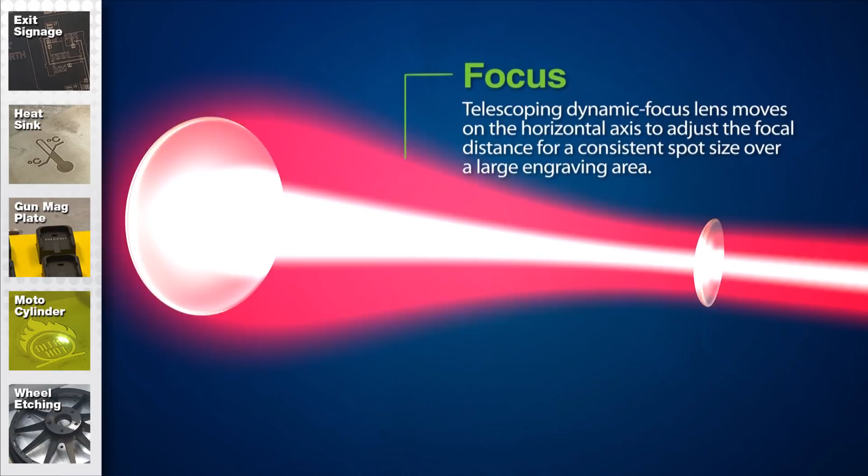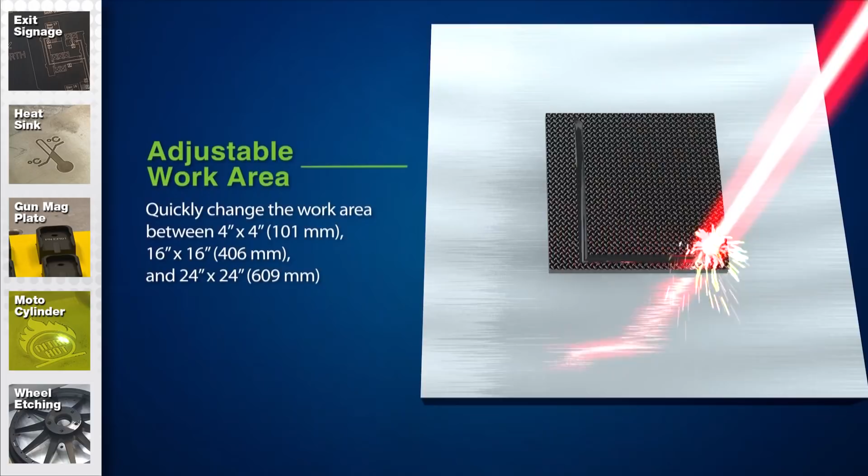With the Epilog G2, we're using a 3-axis Galvo with a translator optic in here. The translator optic has a dynamic adjustment that compensates for beam diameter as we're marking over a much larger area. So with the G2, we've identified and described 3 different marking fields in the machine.

We have near field, which gives us a 4x4 area, midfield, which is a 16-inch area, and then in far field, a 24-inch area. Big advantage for a lot of our customers that are doing multi-part marking or large pieces that they want to mark as well. We'll go over that a little bit more as we're going along with the demonstration.

Also, in regards to laser sources, we're using 2 different types of lasers. We have a Q-switch laser and a MOPA laser. A Q-switch gives us a fixed pulse length, limited frequency ranges, typically used for deep engraving or surface marking. It's going to offer our customers a little bit lower price.

The MOPA laser is master oscillator, power amplifier, gives us a variable pulse length laser, greater frequency ranges, essentially more knobs to turn to produce different types of marks on the metal. More used for finer control on metal marking and engraving, enhanced plastic marking, and in some cases, nice colors on different types of metals. So with that, let's get started with marking some metals.

We're going to jump into the software suite, set up some jobs to run in the laser, and we'll get started right now. Before we get started processing materials, I'd like to spend a little bit of time on the control panel of the laser system. Power switch on the right-hand side.

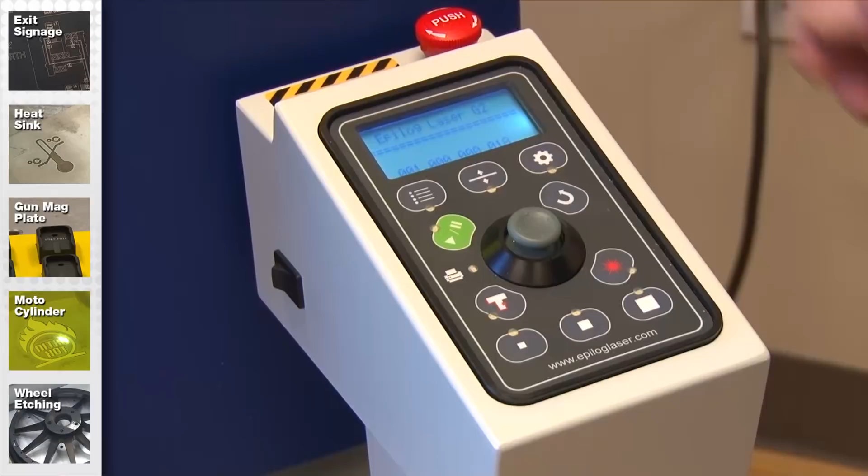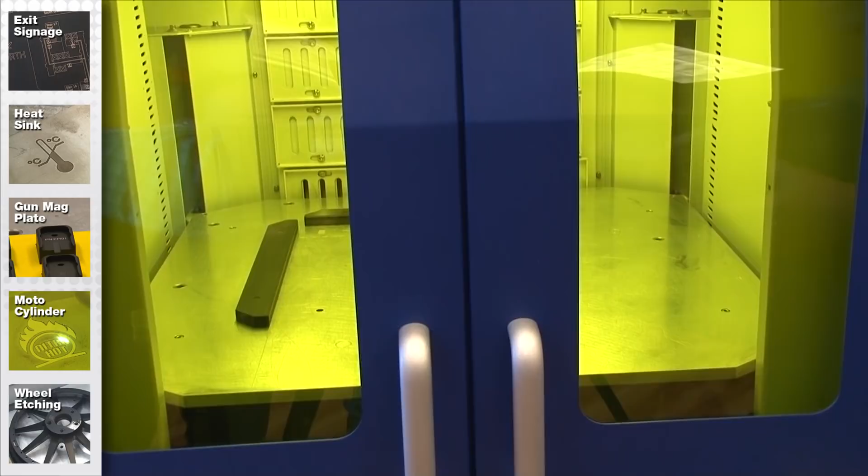The first thing you notice when we turn the laser on is that we've got a nice lighted cabinet in the machine. We can toggle that on and off. Sometimes it helps with the red diode pointer for locating focus and also tracing where you're going to mark on a part to turn the cabinet light off. Just provides for a little bit better view of the red diode pointer.

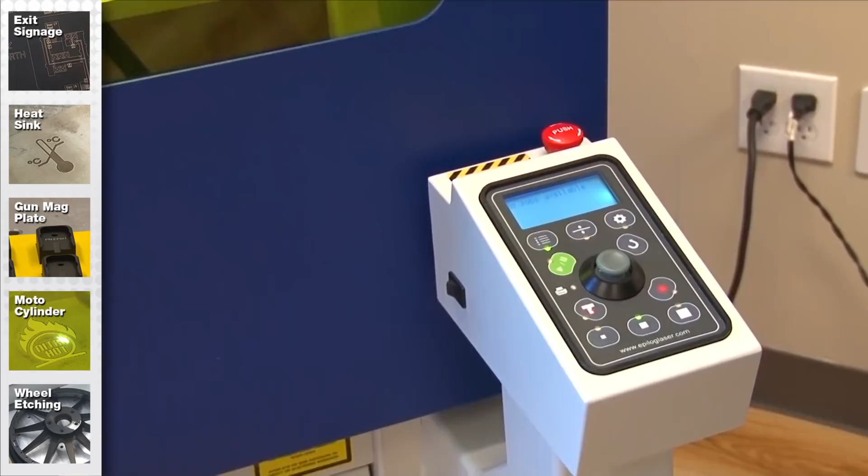At the control panel, you can see we've got a variety of different buttons here. It's all symbol-based information here. This is our jobs list. We don't have any jobs in here currently, but if we had sent multiple jobs over, we could push this button and then scroll through and select the job that we want to run. This is our focus feature.

Right now, we have the laser system set in the midfield, so this provides us with a 16-inch by 16-inch marking field. Currently, the table is sitting at about 25 millimeters higher than the ideal focus range in this machine. This button is pretty neat down here. These describe the different fields that we're working in.

If we wanted to mark in near field, we simply push and hold this button. You'll notice that we get a moving translator here. And now you see that we're 238 millimeters off. So in this case, we would want to raise the table up until it's at a 0 focus. Then we're in the ideal focus range.

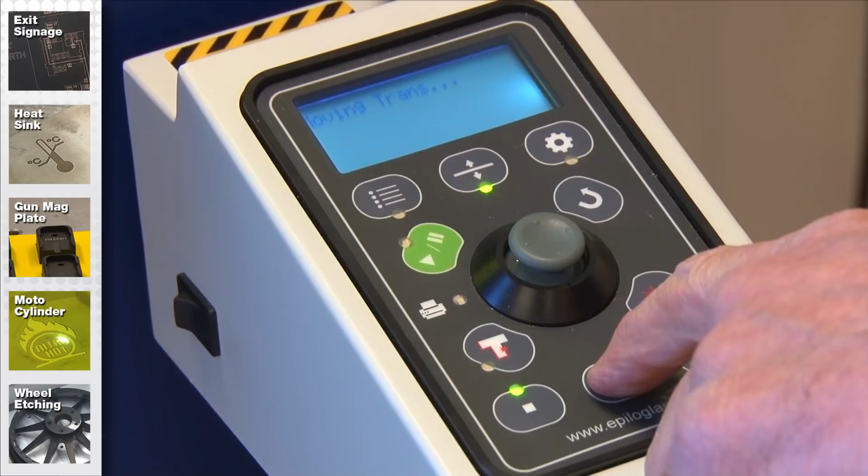If we switch back to midfield, which is what we're going to use for our first engraving marking that we do today, you notice that I press and hold this button, and this brings us to a 0 focus in that location. Same thing would apply here for far field. If we wanted to move to the far field, we'd push this once.

The translator moves within the Galvo device, and then if we press and hold this, the table would go all the way down to read a 0 focus, then it would be in the ideal focal range for that location. But we're just going to switch back to midfield marking for now.

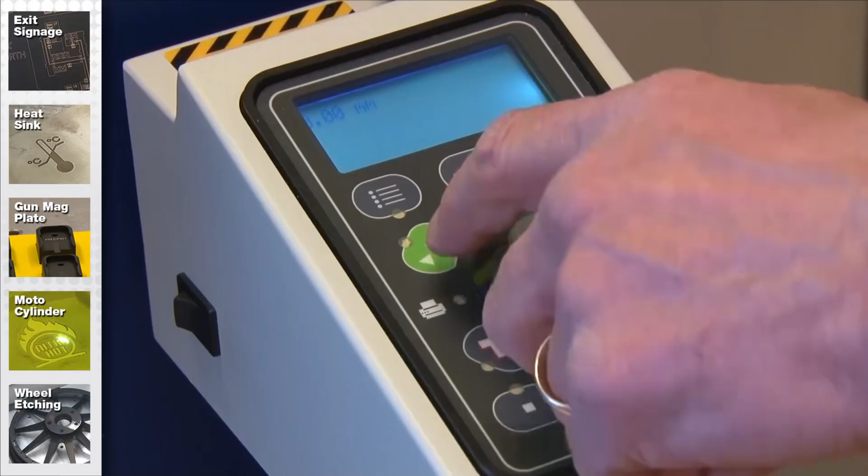This button is a start and pause button while you're running a job. To start a job, you push this button, that starts it, and then to pause it, you press it again. That will pause the job. If you repress the go button, it will start up right back where we left off.

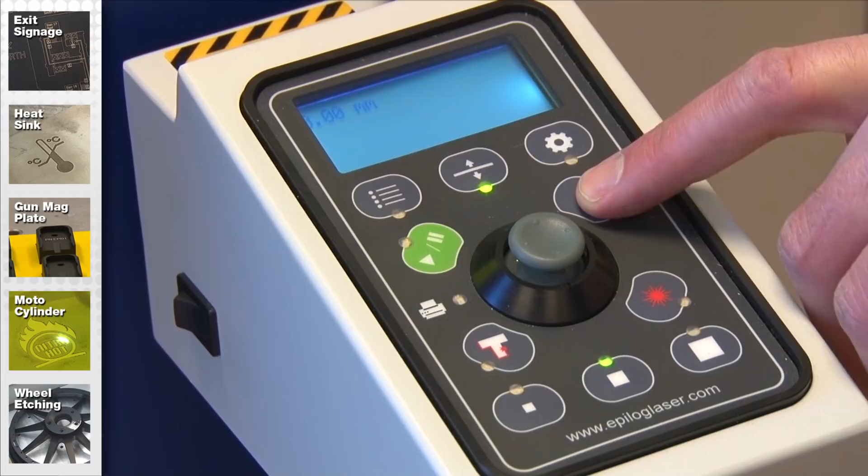This would be a reset button. If you started the job and you want to stop that job in process, you could hit this and that will reset the job.

This is our trace function. So when we're running a job, we want to make sure that we're going to be marking in the correct location. We press this button and that provides a red box around the location of where we're going to be marking. Really handy for making sure that you're marking in the right location.

And then lastly, this is the tools button here. This is where we set the IP address for the machine. I should point out that all Epilog laser systems, including the G2, can operate through either a USB connection or a network connection. Network connection is really favorable with a lot of our customers.

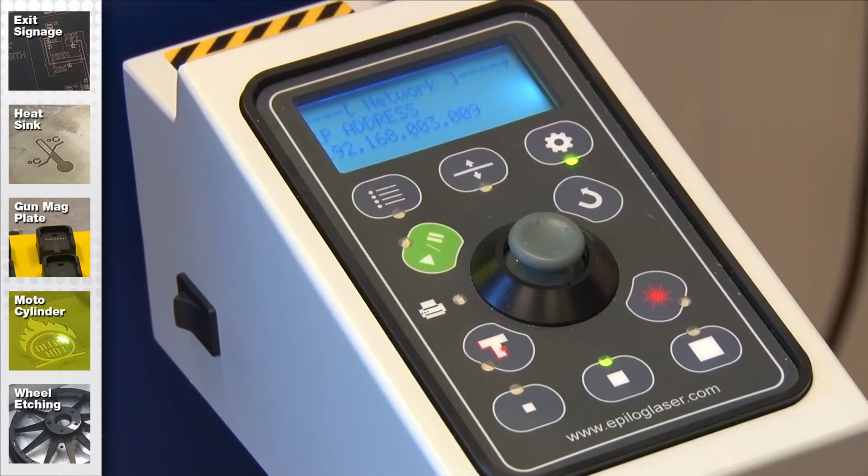They may have 2 or 3 or 4 flatbed lasers running through a network. They can simply hook this up, just establish a new IP address for the G2, and direct different laser jobs to all of those different laser systems through the different IP addresses. So in here we set all of the parameters, all of the base settings for this machine. So a little bit about the control panel there.

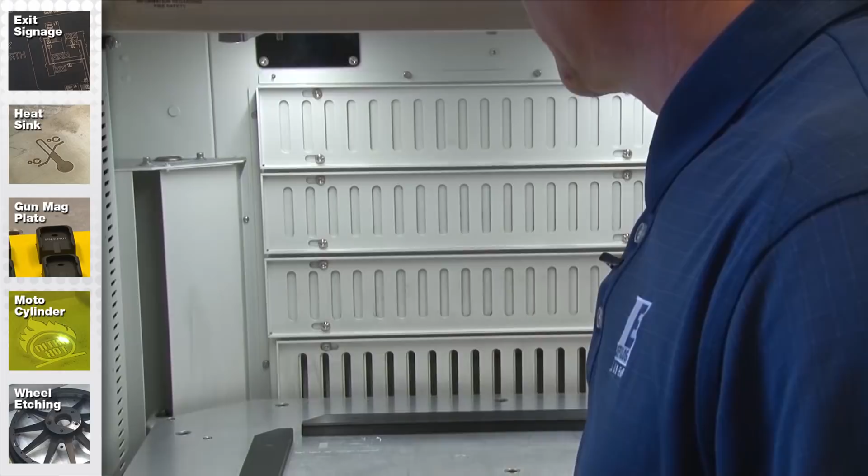Inside you'll notice that in the back of the machine, we've got louvers that allow us to close and open different regions on the table. If we're marking in near field, for instance, we could close this louver, open this one. This allows the particulates, the vapors created during the marking process, to be efficiently removed from the laser system cabinet. So we've got louvers for all 3 different marking fields. We'll open that one because we're going to be working in the midfield today.

Also with this machine, we've got different edge guides that we can use. Right now I've got the edge guide set at this location. This would correspond to the 16x16 marking field. If we're working in the 4x4 marking field, we would set the edge guides right there.

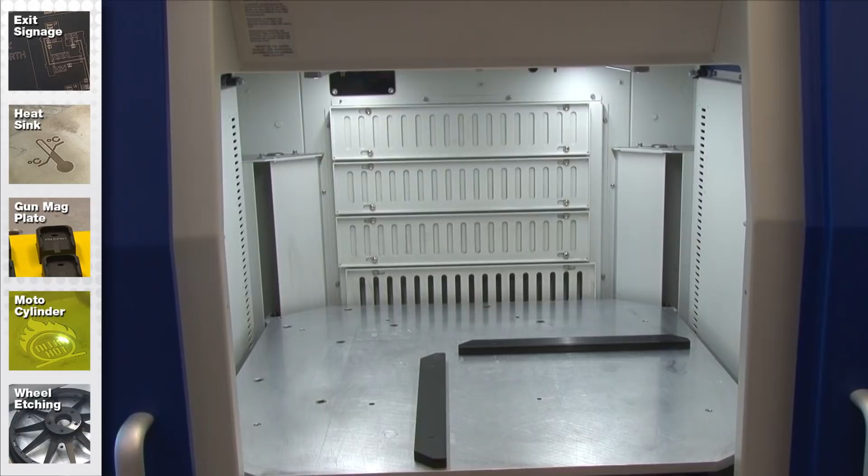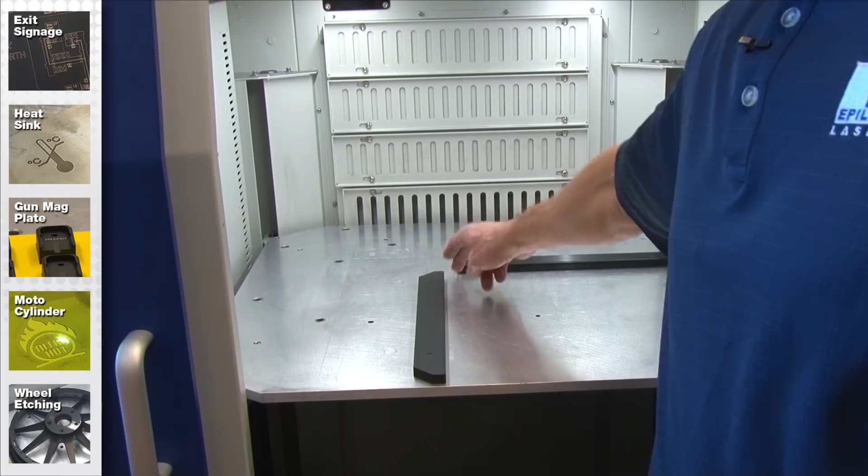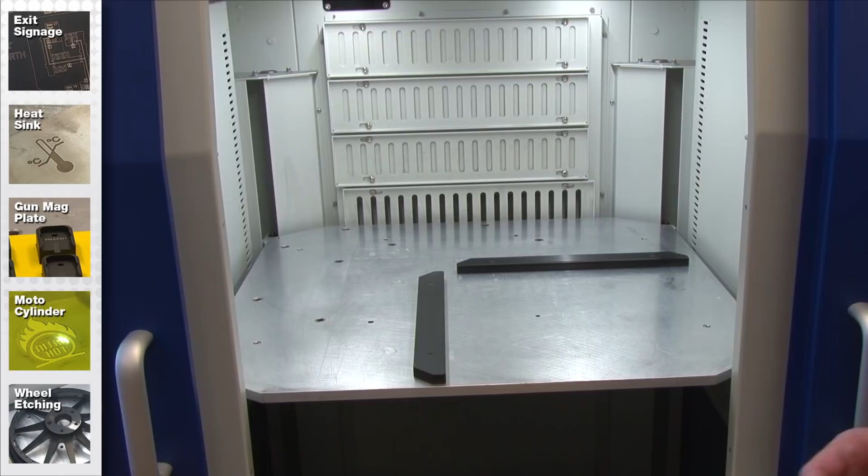What's unique about the G2 as well is that we're working on an XY0 coordinate system. Much like our flatbed lasers, where these two intersect is the 0, 0 position on the table. This would correspond to the upper left corner of the graphic page that you've set up. So really intuitive for a lot of our customers that are used to that type of setup. If we're marking in far field, we would simply move the edge guides out to this location. And then again, this upper left corner would correspond to the upper left corner of that 24x24 space.

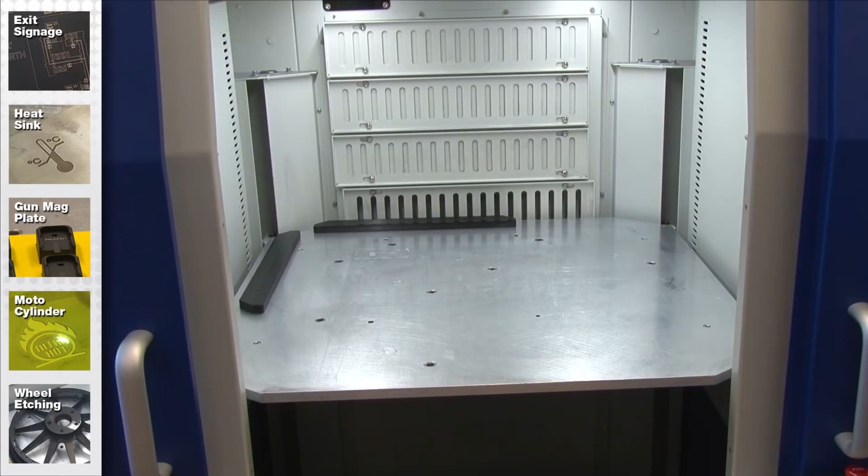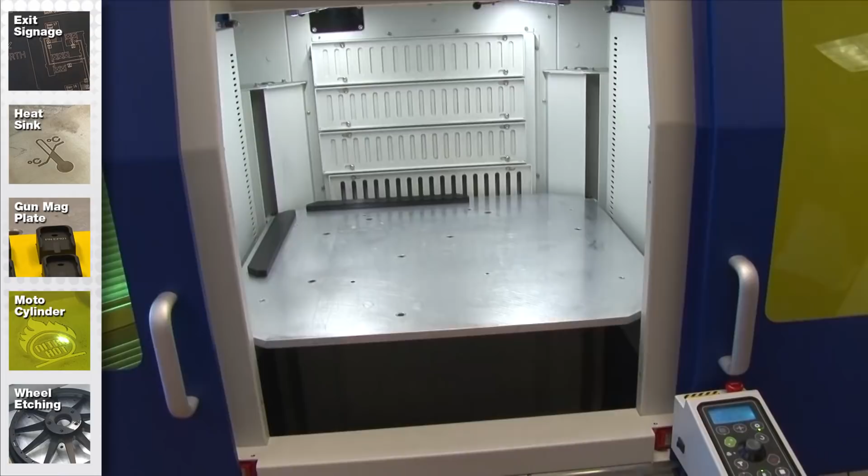So just a little preview on the control panel and then inside the laser system. Let's move now over to the artwork side and the software suite, and we'll show you how we set up a job to run in the G2. The first graphic we're going to work on today is just a simple engineering drawing for a building. This is on a 12x12 space here, so we're going to use the 16x16 marking field for this example.

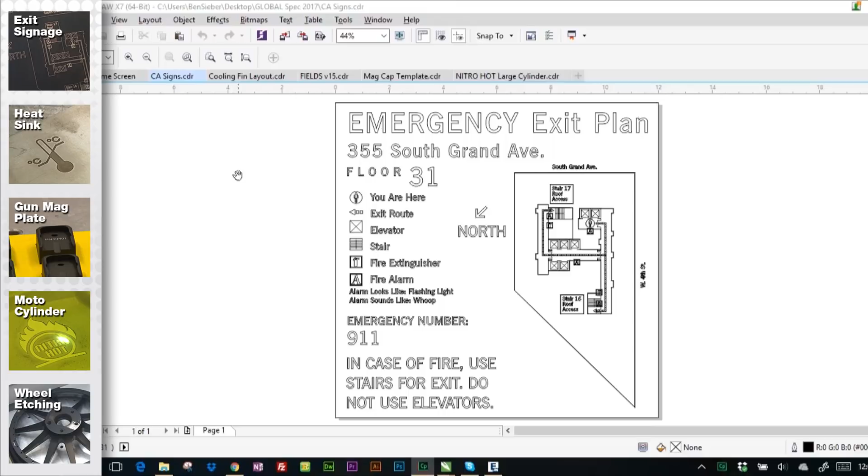You'll notice in this graphic that this is all outline information here. So we have the ability in the G2 to do outline marking by setting a line width to 3/1000 inch or less. This is just going to simply produce an outline over all this graphic that you see here. Later we're going to be doing some marking where we're using filled areas to produce, of course, a different type of effect, but this is going to be a very high-speed mark.

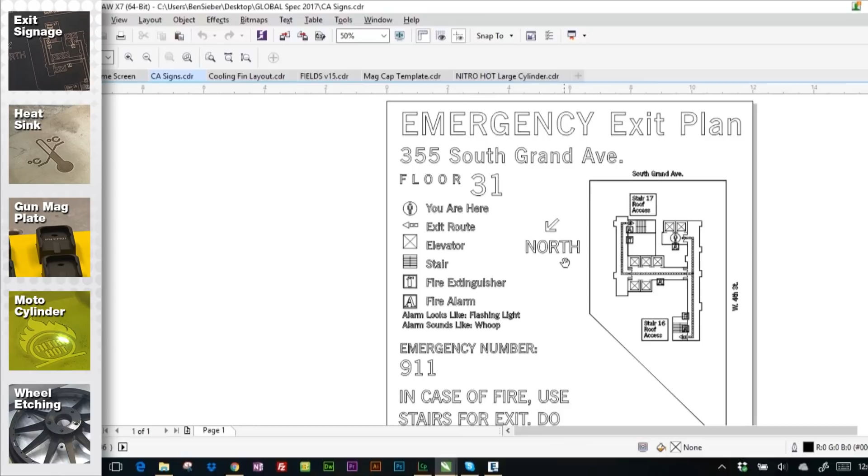Once we've got the graphic constructed, again, we're just using CorelDRAW for our work here. The G2 is compatible with a variety of different softwares.

A lot of our customers will use Adobe Illustrator or InDesign, AutoCAD, SolidWorks, Bartender, Engrave Lab, a variety of different software packages to work with our G2 laser system, much like they do all of our laser systems. So we feel like this is going to be a big advantage to a lot of our customers: the ability to use whatever software they like and are used to, instead of having to use the proprietary software that is typical with most Galvo-based systems.

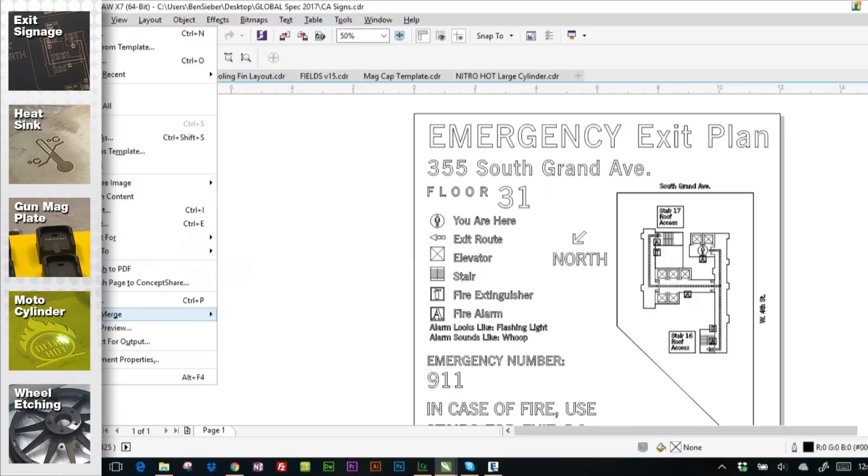So once we've got the graphic created here, we simply go to File and then Print. And you'll notice when we click on the Print button, we have different lasers that we can select from here. You can see a bunch of different output devices. We're going to select the Epilog engraver, and once we've selected that, we go to OK. And here we see our dashboard being populated on the screen. The dashboard is where we set all the laser parameters for this particular job.

I'm going to spend a little time in here just explaining what we're seeing, and then we'll process this job, and then we'll move on to the next one, and we're going to use more functionality in this. So the name up here, CA Signs, this is the job title. We can change this if we wanted to in the dashboard. Autofocus on or off. If we wanted to autofocus on this particular material, the material that we're going to use, just some sheet stock anodized aluminum, is about 0.06 inches thick, so we can program that as well.

For now though, I'm just going to do a manual focus on here. I'll show you how we do that. We'll do some autofocus with some of the other work that we're going to be doing here in a little bit. So for all of our work in the G2, we select the hatch raster type. Here I'm going to select vector on with the graphic that we've got right now. We want to run this in this mode where we're using this vector function. This allows us to do any sort of vector marking that is line width of 3/1000 inch or less.

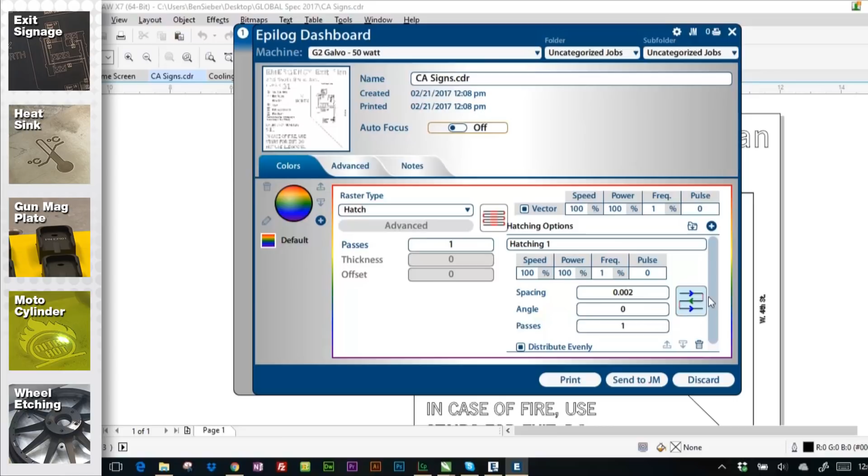If we're going to be doing filled marking, we'll be using these functions down here. I'm going to go over that with some of the samples we've got coming up. So I'm just going to get rid of this for now. And here we're only working with vector. So in this mode, I can set the speed to whatever I want. I know on this particular material, I can do a very high speed mark.

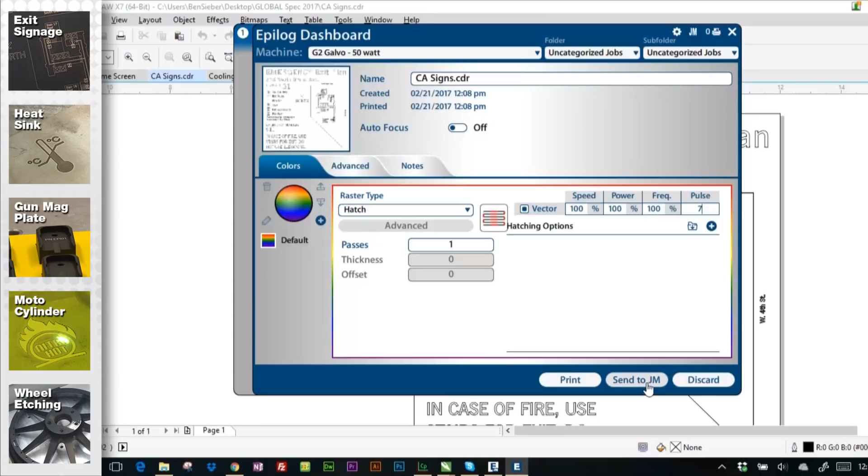I'm going to set the power high as well. And the frequency value, I'm going to set high as well. The pulse range, I'm going to set to maximum at 7. The pulsing values with the G2 range from 0 to 7. 7 gives us more energy to be ablating the material on the anodized. And once we've got all of these set, I simply click Send to Job Manager. And then the Job Manager pops up, and you can see there it is.

The Job Manager basically stores all of the jobs that we're planning to send over to the laser. What's nice about the Job Manager is that you can come back in here into the manager without opening your graphic software and reprint that job from the Job Manager. Also, some features in the Job Manager are really nice. You can open it up. You can change different things.

If we wanted to maybe set the power to 80% here, we could do that and save that. And if we wanted to do a couple passes, maybe we'll do 2 passes on this to get a little bit more depth into the material. We can program that as well. So once we've got that set, I can click on Save, and then here I just click on the Print button in the Job Manager, and the job is transferred over to the laser.

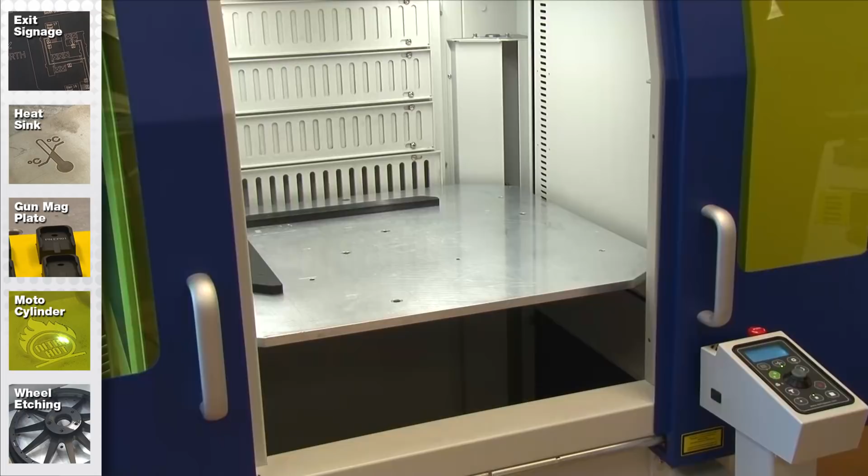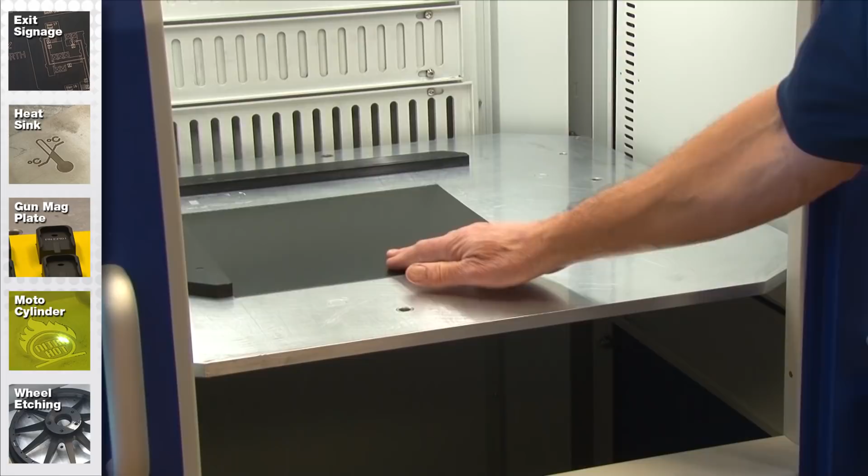So here's my material that we're going to use. Again, just sheet stock anodized aluminum, some industrial signage piece that we're working on. I mentioned the edge guides that go in here. So with the 12 by 12 piece, again, the upper left corner of my graphic page corresponds to the upper left corner on the edge guides there. So this is the proper location for where we want to mark.

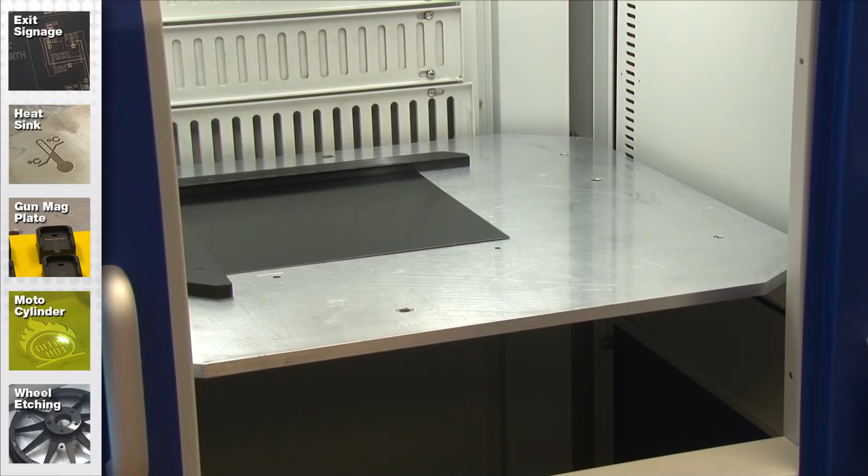At the control panel of the laser, I'll want to adjust the focus so we have the right distance. We want to lower the table to account for the thickness of this material to be in the right focal plane. So I'll press the focus button, and then I'm just going to lower this down to 0.6 millimeter, which I know is the thickness of that material.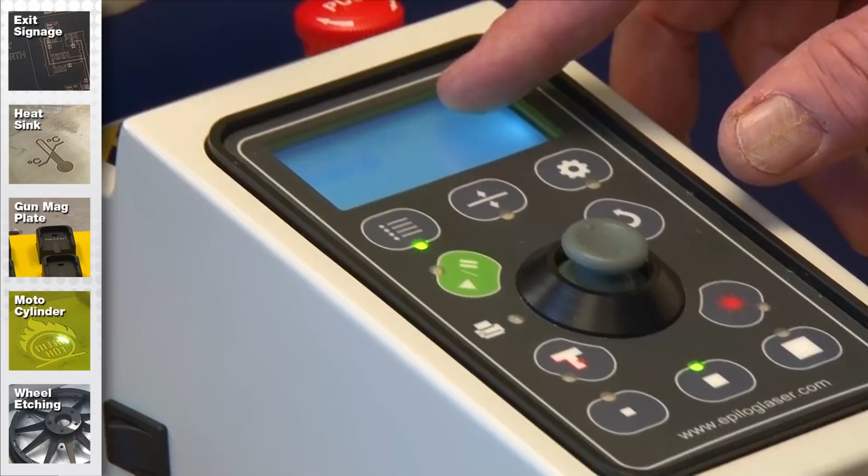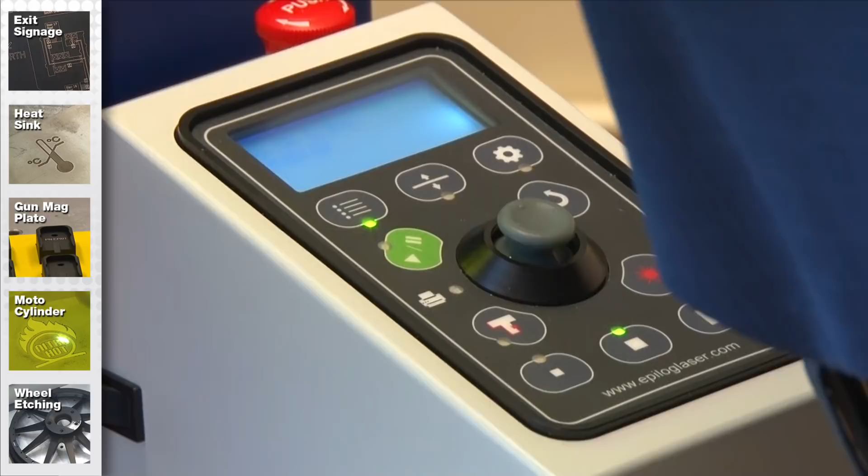Perfect. And then I'll press on the Jobs button. There's our Exit Signs job that came through. The name of the graphic file, as we've given it in the software, shows up here on our LCD display panel. Once we've got that set, the focus is good, we can then start the job. So we'll turn the camera over to the machine, and then we'll let this thing run.

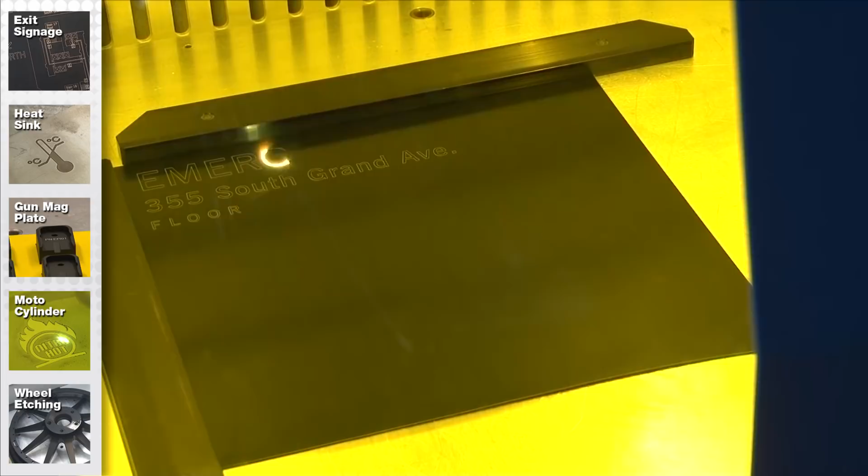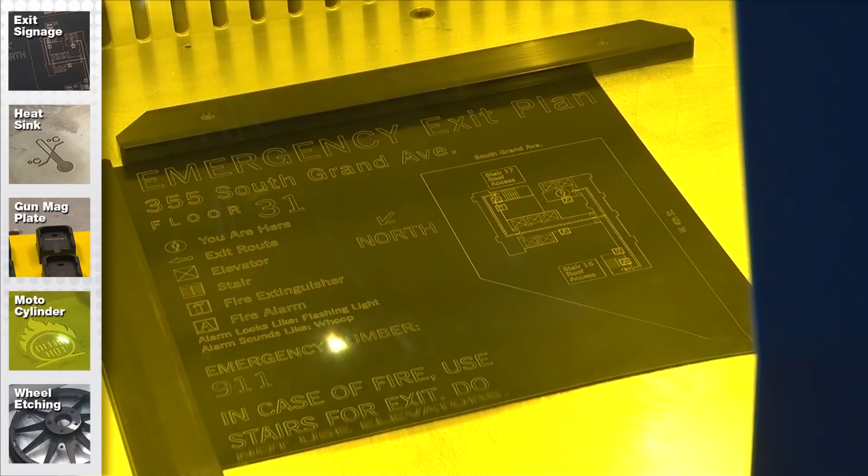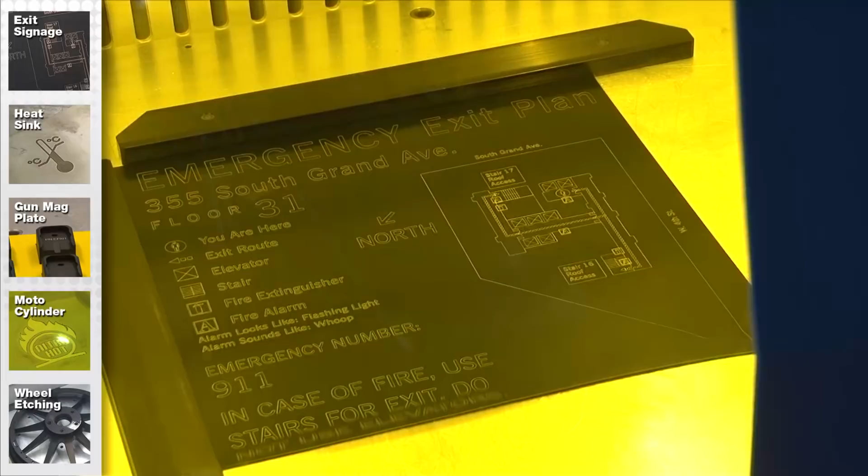So you'll notice the second pass is going over the exact same location. This is going to provide a little bit more depth into the material for more permanence, or in some cases it'll brighten up the mark as well to give you more contrast. So that was about 16 seconds per run, so about 32 seconds for the total job time.

I'm just going to tip this up so you can see it. We've got a nice mark there on the material, very permanent, some nice depth into the material as well. Now let's move on to the next job.

The next job that we're going to process in the G2 laser are some heat sinks, typical industrial marking application on just bare aluminum material. So first thing you notice in the CorelDRAW setup here is that I've got a 16 by 16 page size. I've measured the size of the heat sinks. They're about 3.2 in size. And then I've populated those across the entire page, fit as many as I can into this space.

So I'll zoom in on this. You can see that we're going to put this little mark indicator on the back side of the heat sink. With the G2, of course, we can load up as many parts in this 16 by 16 space that will fit. For this example, we're just going to run the top row of this symbol on the different heat sinks.

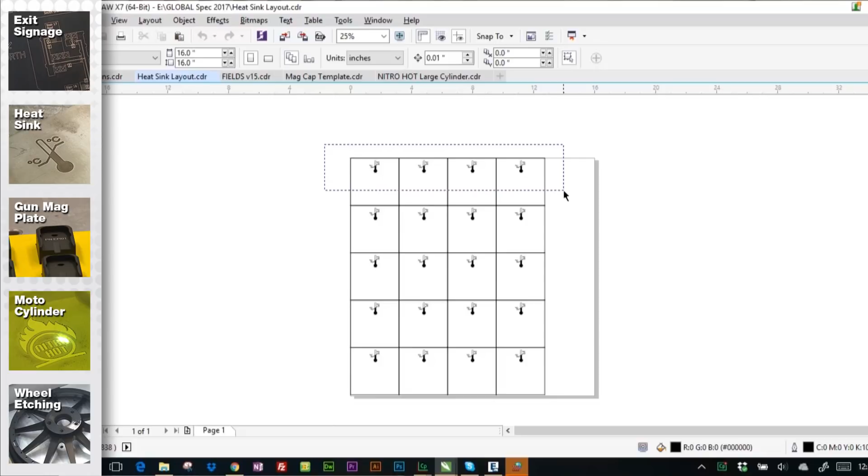So I'm going to select those, and then I go to our dashboard print driver. Here in the print dialog, I'll select selection only. That means we're just going to run the ones at the top of the page there. And then here I click OK. This brings up our dashboard print driver. This is a great feature. Again, this is where we can set all the laser parameters for this particular job.

What we're going to do with this material is set some different laser parameters. We don't have any vector or thin line art that we're going to use in here, so I'm just going to deselect this. This is where we can set different hatching patterns for the work that we're going to do. So for this particular material, I know that I can run about 75 speed, 100 power. I'm going to set the frequency to 100 as well. And then I want a lot of pulsing energy, so I'm going to set this to 7.

Here we can also set different line spacing. I'll maybe set this to 0.0015, so it'd be 1.5 thousandths spacing between the lines, so we'll have a nice deep engraving into those areas. The wider we set that, of course, the farther apart the lines are. In some applications, that's advantageous to have a wider line spacing. For this bare aluminum, we'll just use that 1.5 thousandths.

And here we can set the angle at which we want the laser beam to work on the material. So we'll set this at a 45-degree angle, and then we're going to do just one pass on that. I'm going to add a second pass opposite of 45 to get a little more depth into the material, create a little more permanence into that mark.

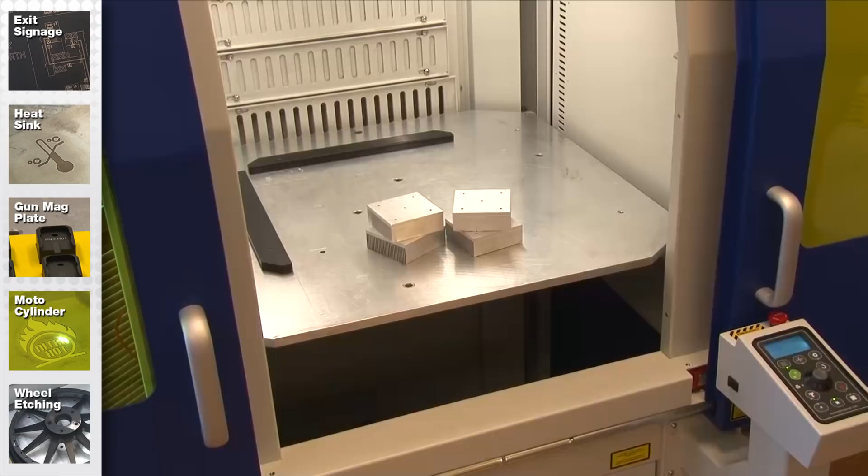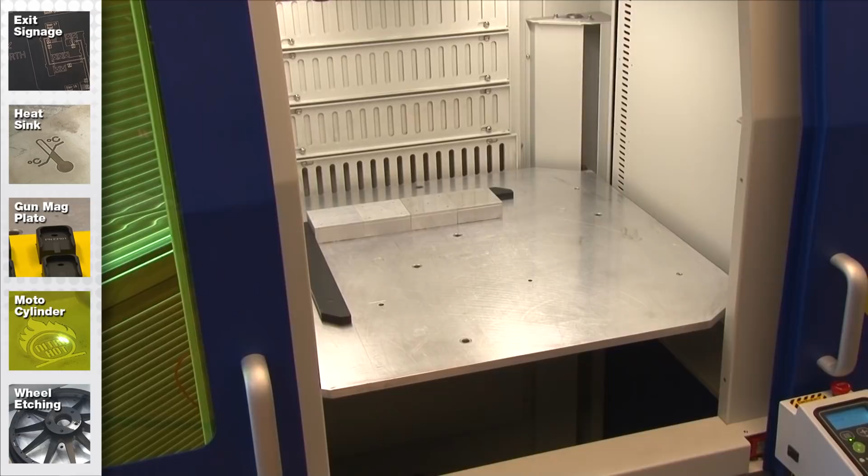So the first thing I'm going to do is just nest my parts up in the upper left corner. Again, if I was going to do the entire batch, I could just continue to place them in here, and the laser would do all of those at the same time. I also need to make sure that I've got my focus set correctly. So I'm going to adjust the focus at the control panel on the laser.

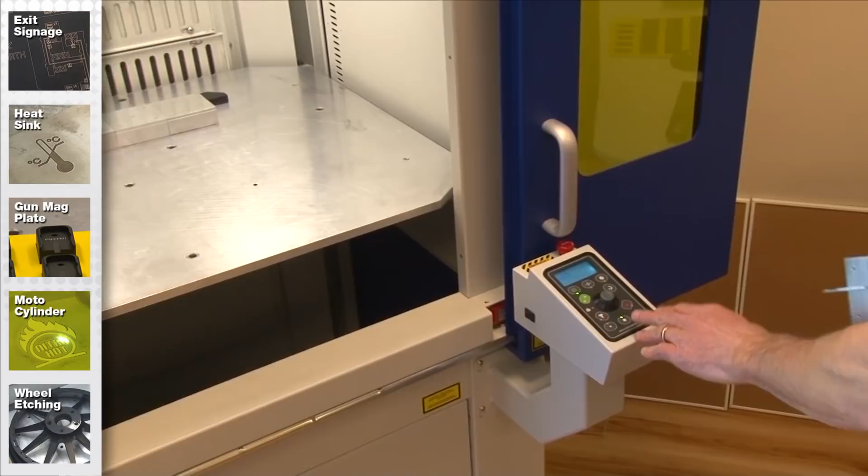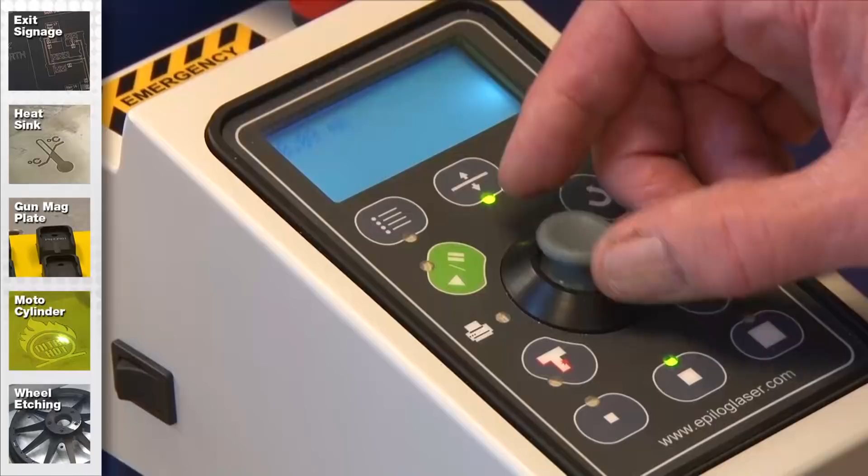The control panel on the laser is set in metric right now. You can switch that to inches or metric, whatever you prefer. So the height of that heat sink is 30 millimeters. So I'm going to go to the focus button, and then I'm going to bring the table down to 30 millimeters, and then we'll start the marking. Okay, once we've got the proper focal distance set, we close the doors.

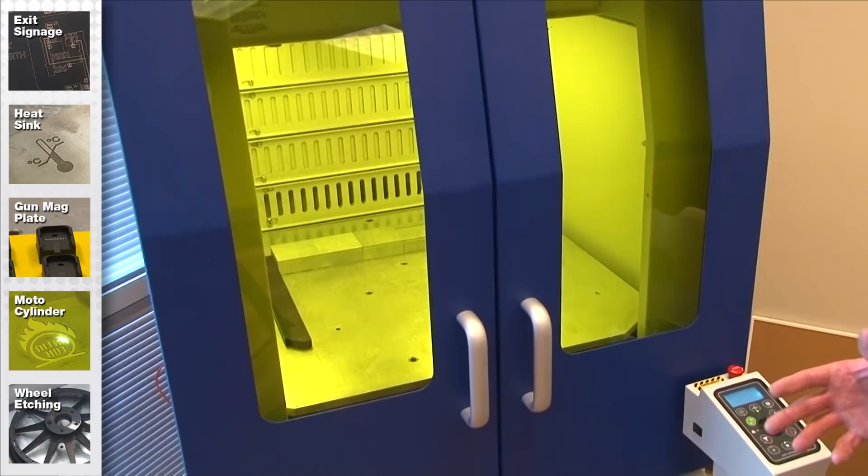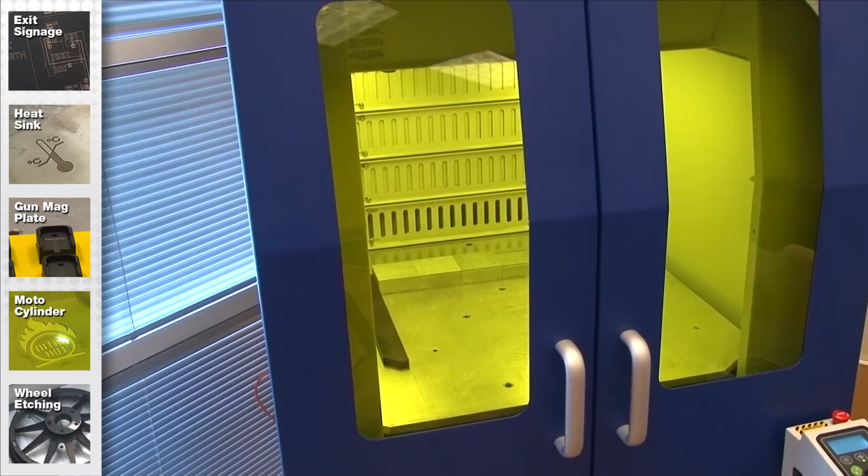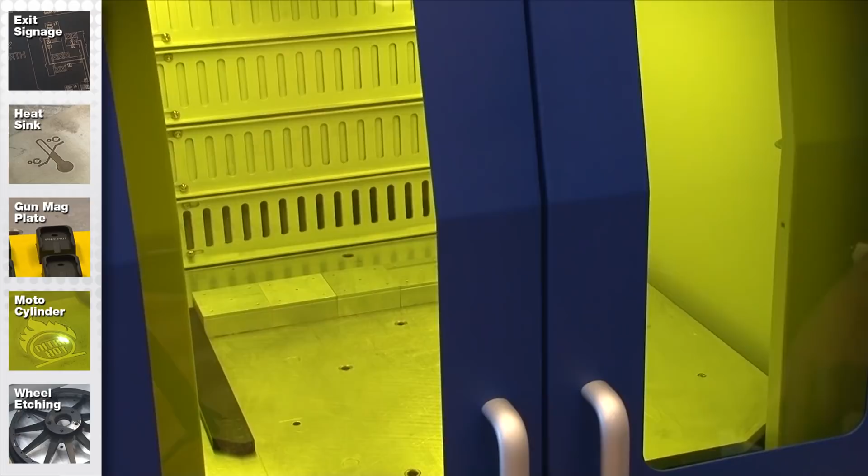Notice on the front door of the G2 laser system, we've got some really big viewing panels on here. You'll also notice it's got a yellow tint to it. There's an organic dye in this Lexan material that absorbs the light energy, so there's no way for the laser beam to escape the cabinet. It's really important, especially for this wavelength of light, that you have a fully interlocked, fully safe machine for operation. So once we've got that set up, the focus is good, I go to the control panel, select the Jobs button, and then I can start the job.

So there's the first pass on each of the parts, and when this is done, it'll come back and do the second pass at the opposite angle. Again, this second pass has given us a little bit more depth into the material. And depending on what your requirements are, you may do multiple passes in many different hatching angles to get more depth. So there's the mark. Nice clean mark, very permanent.

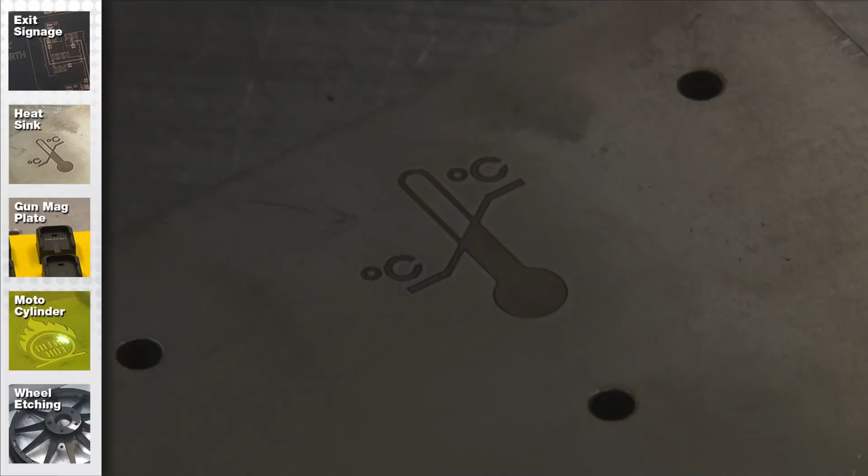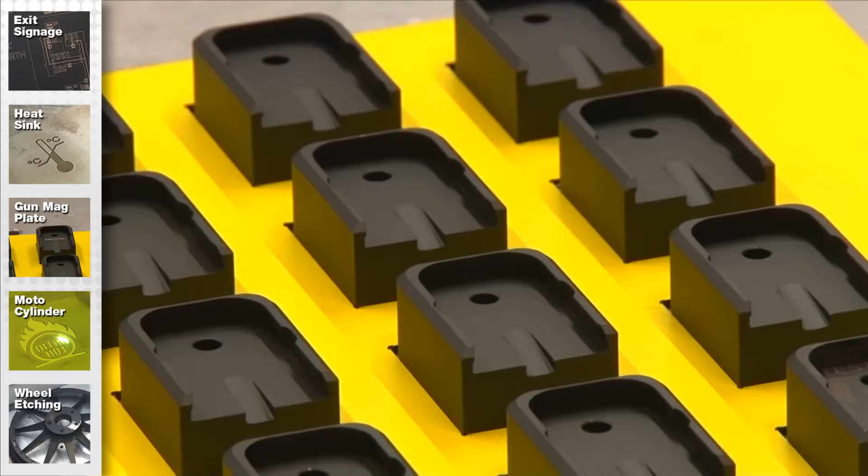Okay, let's move on to the next job. The next group of parts that we're going to work on are some gun magazine floor plates. You'll notice in the video that we've got a template built. I created this jig that fits the parts nicely. This is a 12 by 12 inch setup. When we're ready to process, I'll put that up in the upper left corner.

Again, everything is based on the upper left corner of the graphic image that we're working on here, as well, where those edge guides come together in the upper left corner. Really easy to set jobs up this way. So here, again, I've got the graphic set up. I'm just going to put a part number on those floor plates. So for this example, I'm just going to select a group of those to engrave or to mark with the laser. This is anodized aluminum. This will be a fairly quick mark.

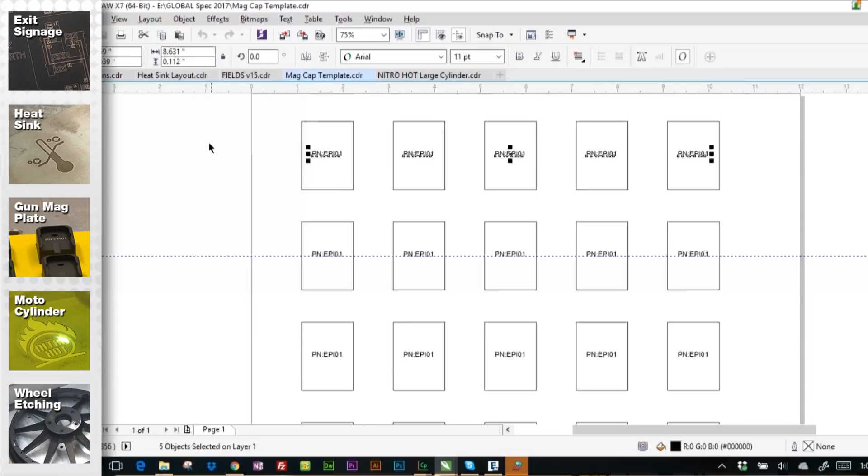So once I, again, have selected the parts that I want to mark, I go to the Job Manager dashboard for the Epilog Laser. And here I can set all the laser parameters for this particular job. First, again, hatch pattern is what we're going to use. We're going to use an open hatch as well. We're going to do one pass on this, and I'm going to use our autofocus feature built into the machine where I can just change the table height. I know that the height of that material is 0.52 inches, and with this particular material I can run very high speed, and I'm going to go lower power.

I'm still going to use 100% frequency and a pulse value of 7. And I'm going to use an angle of 90 going from left to right. The way the artwork is set up, it makes sense to go left to right. It'll save maybe a few seconds on this particular job. And then again, I'm going to use the fastest marking that we have here, the S sweep. You'll notice I don't have another hatching option here, so we're just going to run this with one pass.

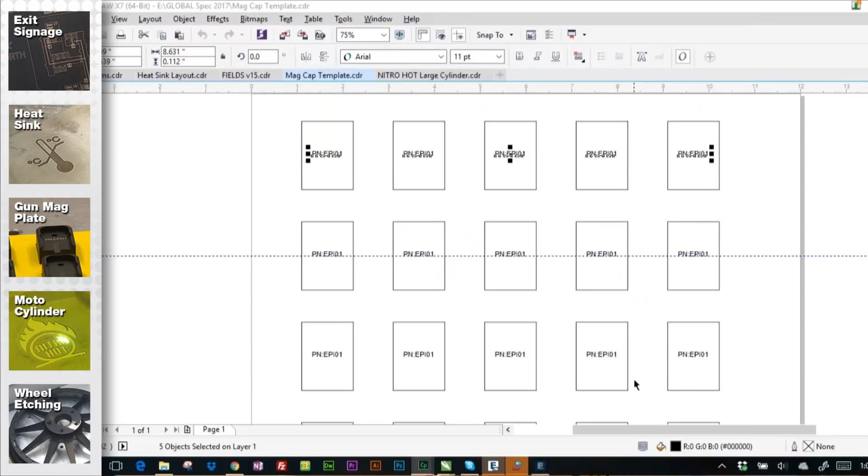So once we've got all those laser parameters set, I'm going to hit Send to Job Manager. I like to use the Job Manager. Again, if I send jobs over to the manager, I can recall them later, bring them up and run them again at a later point in time. Also, if I wanted to change those laser parameters, I could come back into the manager and do that here. So we've got this set. We're using autofocus. I'm going to click on the Print button, and then we'll go over to the laser and get this set up to run.

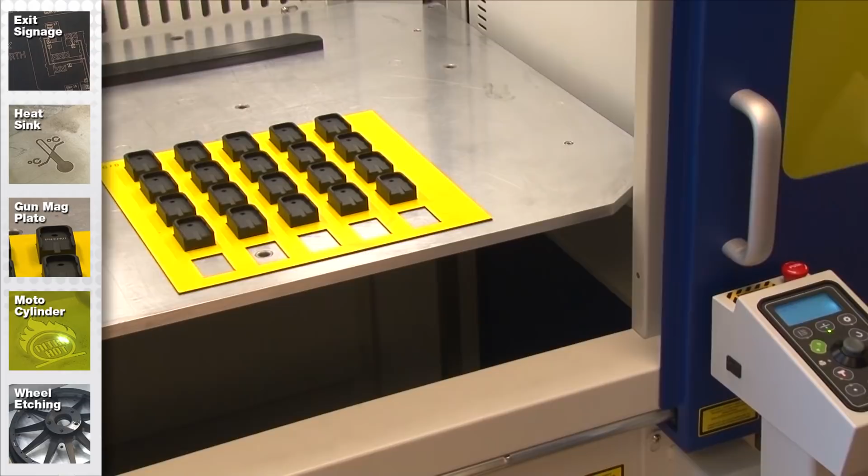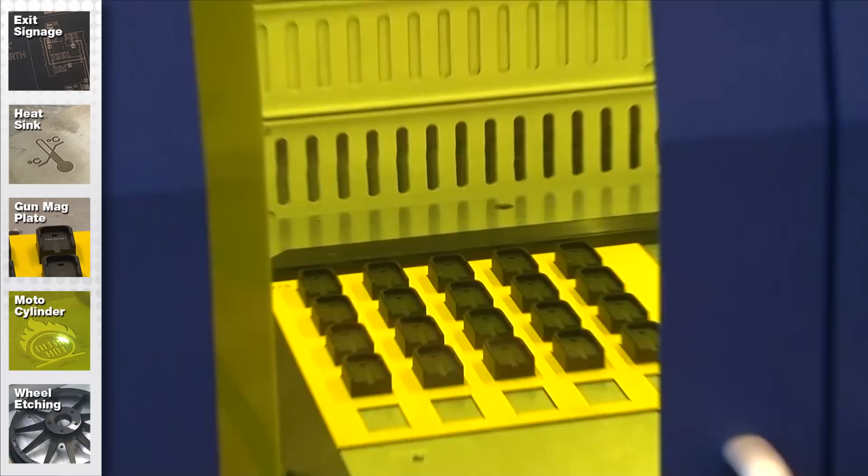First thing I'm going to do is check the focus. We're out a little bit, that's okay. So I'm just going to nest my parts up in here and then close the door. And then when I start this job, you'll notice the table is going to move slightly to the correct focal plane based on the numbers that we programmed into the Job Manager. So I'm ready to select my job. There it is. And then I'll just click on the Start button.

There was a slight movement of the table there coming up to the right focal plane, and you'll notice that the parts are all marking. That was 6 seconds to mark those parts. You'll notice we've got a really nice bright white mark on that anodized aluminum.

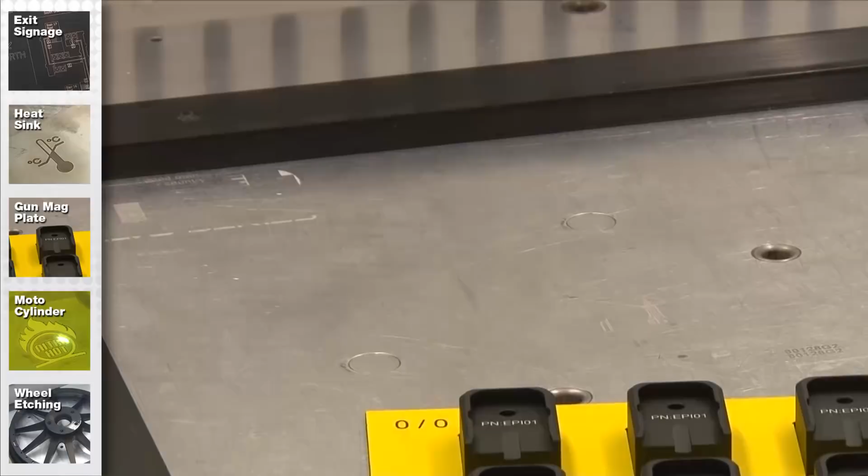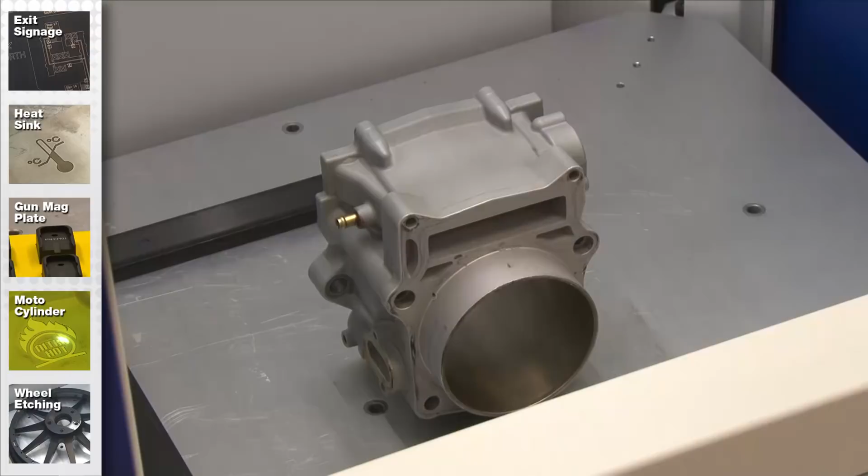Okay, let's move on to the next job. The next part that we're going to mark is a motorcycle cylinder head. For this piece, we've moved the table into the lower position. This would be the far field marking area. One thing I want to point out is the size of parts that you can place in the laser, depending on which field you're marking in.

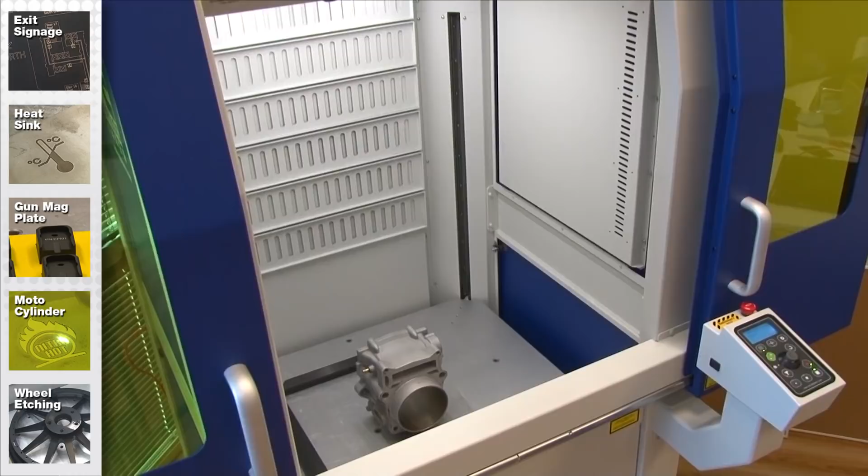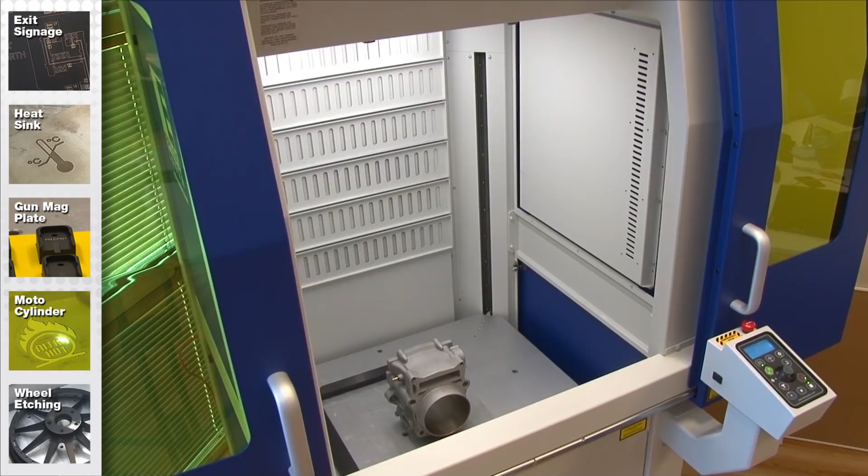In far field, the 24-inch marking area here, we're able to accommodate parts that are almost 16 inches in height. In midfield, the 16-inch marking area, we can go up to just at 26 inches in height. And then in near field, the 4-inch marking area, we can actually accommodate parts that are just over 36 inches in height. So yeah, large capacity in the machine for different height parts.

So I've got a graphic all set up here. You can see we're doing a custom logo on this cylinder head. So the first thing I do is print it over to the dashboard. And then here, I'm just going to send this to the Job Manager. We're going to do something a little bit different here. We're going to pull information from a library that we've already set up in the Job Manager. So I'm just going to send this over to the manager. I'm going to double click on this. You can see that we've got a base parameter already set up in here.

I'm just going to discard that. And then I'm going to go to this import function here. And then I'm going to go to the different categories I've got set up. We're working on cast aluminum, so I'll select that. And I've got a subfolder set up for single cylinder. There's all my laser parameters for that job. If I double click that, it automatically populates my job manager with all of those laser parameters.

So what we've got with this is we're running all of the parameters the same: 75 speed, 100 power, 100 frequency, and a 7 pulse value. You can see that I'm coming in at an angle of 0, and then we're going to come in at 90 degrees, and then also at 45 degrees, and then at 315. Cast irons or cast aluminum is pretty hard to work with, pretty hard to ablate a lot of material. So we're going to come in with 4 different hatch patterns, and then we're going to do that 2 times to get a little bit more depth into the material. So once we've got all that set up, we can save that and then simply print it over to the laser.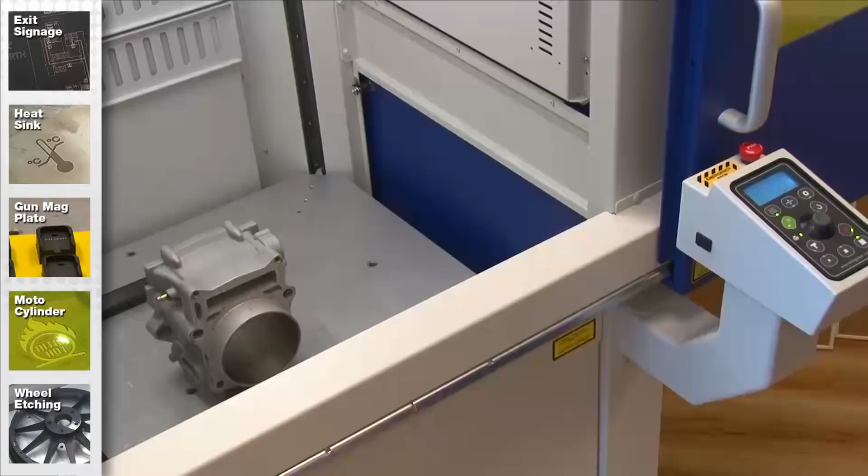Once the job's at the laser, you can see that we've got it set up in the far field with this machine. A couple things I want to show you here. First, we have a focus finder built into the G2 laser. It's a combination of red dots and a red line that when they line up, we're in the correct focal plane. Really handy feature when you're working with odd shaped parts and it's not easy to measure the height of that part.

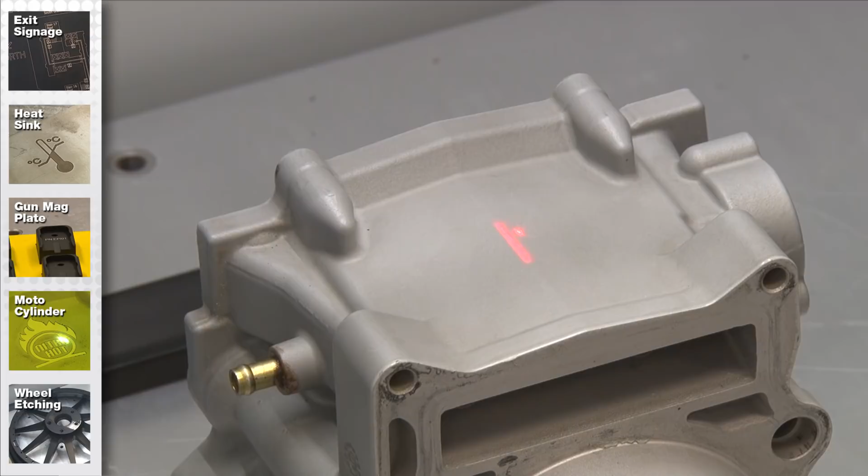So what we do to find that is press and hold the focus button. You'll notice that we've got a red line and a red dot there. And then I'm going to raise the table up until the red spot intersects directly over the red line. Once those two intersect, we're in the correct focal plane. We can stop the table movement there, and we're ready to mark.

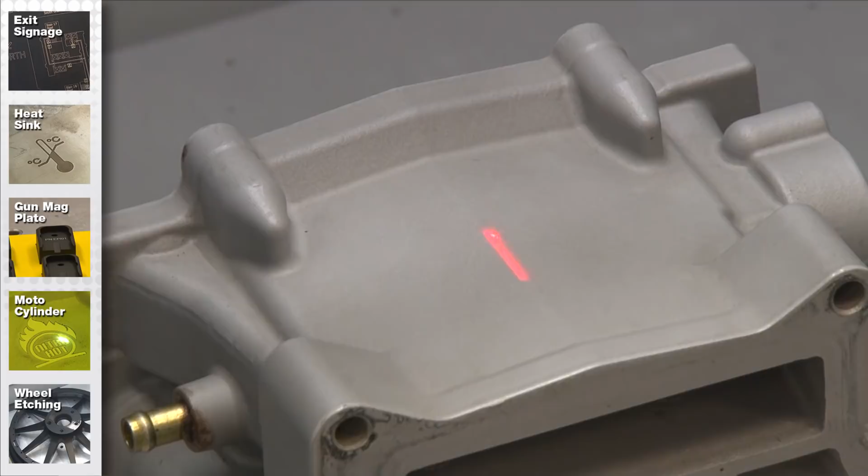Before we mark, however, I'm going to use the trace function in the Galvo to identify the location of where the mark is going to go. So on the control panel of the laser, I press the trace button, and you'll see we've got a red outline that shows the location where the mark is going to go. I'll turn the light off so you can see that a little bit better.

With our part installed and correctly focused, and we've identified the marking location with the trace function here, I'm going to go ahead and turn the trace function off, turn the light on, I'll close the doors, and we'll start the marking. So again, this is going to go through 4 different hatch patterns. We're going to do it 2 times to get a little bit more depth into the material.

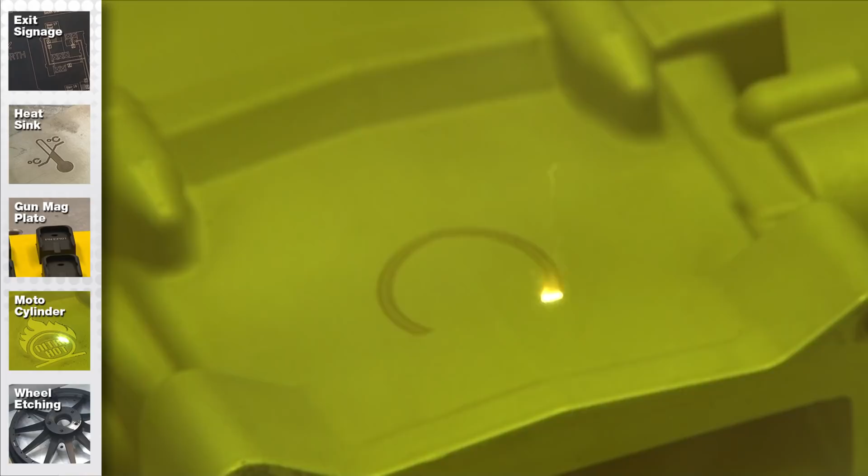While that's running, I'm going to talk a little bit about the power density of the laser beam relative to the field in which we're working. I've got a part that I'll show you. I'll just put it on the display panel here. You should be able to see in the 3 different field marks here, we've got some nice depth into those things. We ran all the same laser parameters for each of those different engravings. We had the same hatch patterns, the same number of passes, and the resultant time was the same for all of those as well.

So our customers that are going to want to do real deep engraving are probably going to find it to be more time efficient to do it either in near field or midfield. But certainly we can get really good depth in far field as well. So we'll turn our attention back to the laser, and you can really hear it starting to rip through the metal now. We're getting some nice depth into it. Again, we're running a total of 8 passes on here, so we should get a pretty nice deep engraving into this cast aluminum.

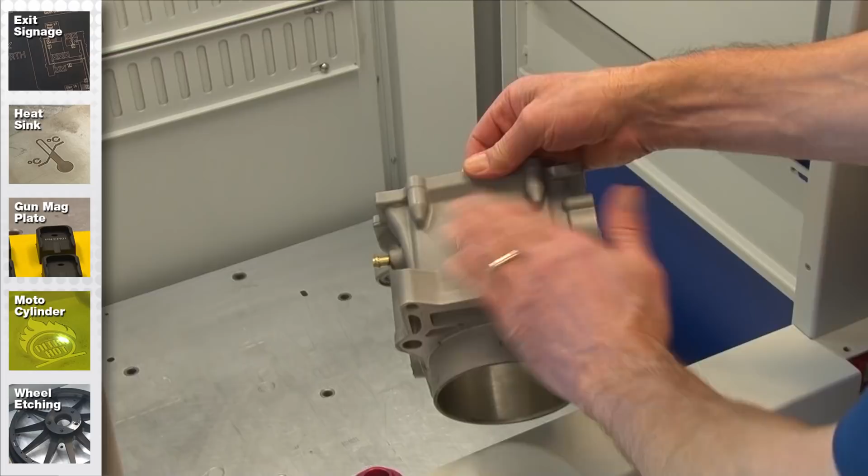All right, the beep tone tells us the job is done. I'm just going to pull the part up here a little bit so we can take a look at that mark on there. A little bit of ablated material on there. Use a soft bristle brush and that comes right off. But you can see we've got a nice permanent deep mark into that metal.

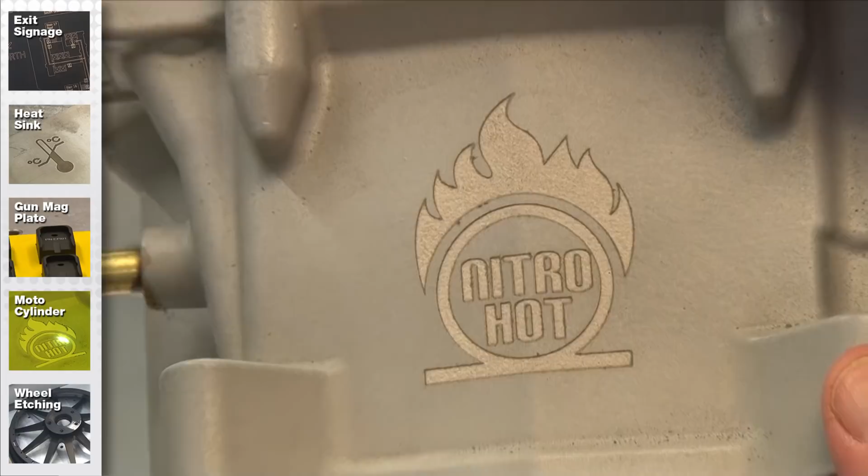Okay, we have one more project that we're going to do. So now let's move on to the next job. The last piece that we're going to process today is a wheel component. On the screen here you can see that we've included some specifications for this particular 22-inch wheel that we put in the G2 laser system. With this size, of course, we'll be marking in the 24-inch field.

So this is all set up. We've got spec data on the top, left, bottom, and right side of the wheel. And so we'll print this over to the machine. We'll select those components that we want to mark, hit the print icon, and click OK. And then here, again, in the dashboard, we'll set the laser parameters. This is just a powder-coated material, so this is going to be pretty quick.

We're going to do one pass at this, and then I'm going to apply 100 speed, maybe we'll have 75 power on this to get through that powder coating, frequency of 100, and I'm going to try a pulse value of 6. We'll come in at a 90-degree angle, and then, again, just the one pass, and we'll do an open sweep on this one. It'll be a little bit slower, but it should work pretty well. So we're ready to go.

I'm going to send this over to the job manager. There's our job there. One thing I need to show you in the job manager is this preview function. This gives you the ability to look at this as well in the preview to make sure that you've got the right job and everything looks good in there. And we'll go back to our colors tab and we'll save that, and then we can print it over to the laser. So the job's arrived at the laser, and we'll close the doors and let this run.

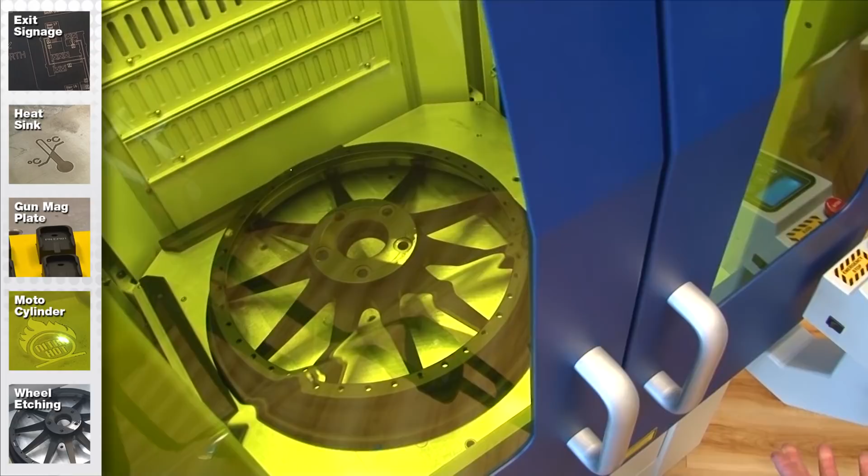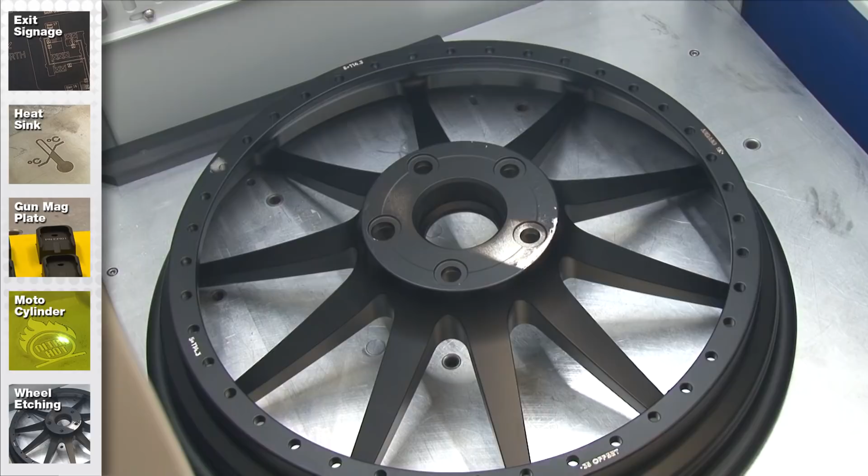But we'll actually hit it with another pass and see if we can get that to brighten up. There we go. So it looks like 3 passes with this powder coating does a nice job to clean that up. So now we've marked the specifications for this wheel component all the way around that 22-inch diameter wheel. That concludes the marking for today. I'd like to do a quick summary before we jump into the question and answer session.

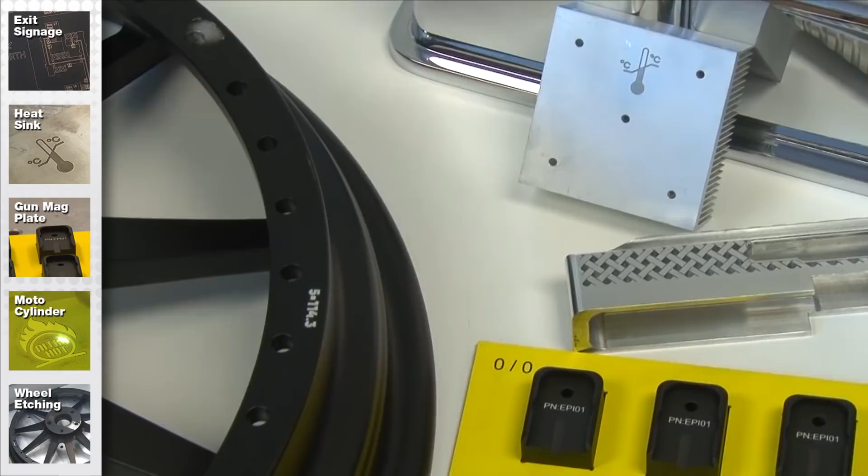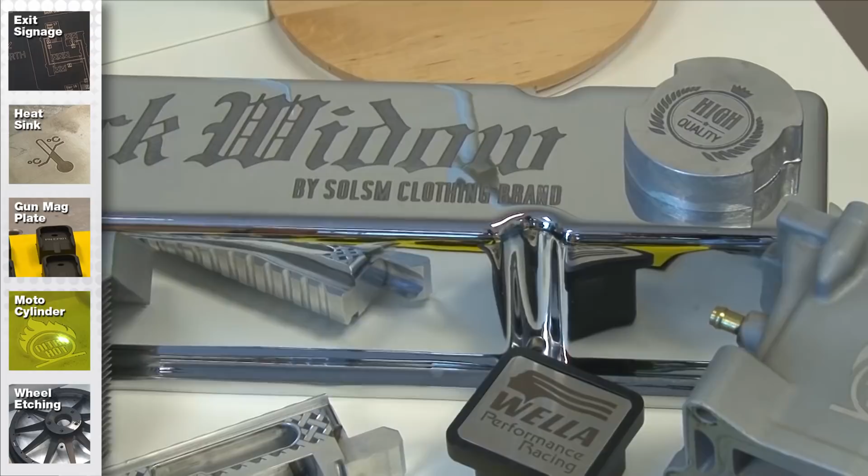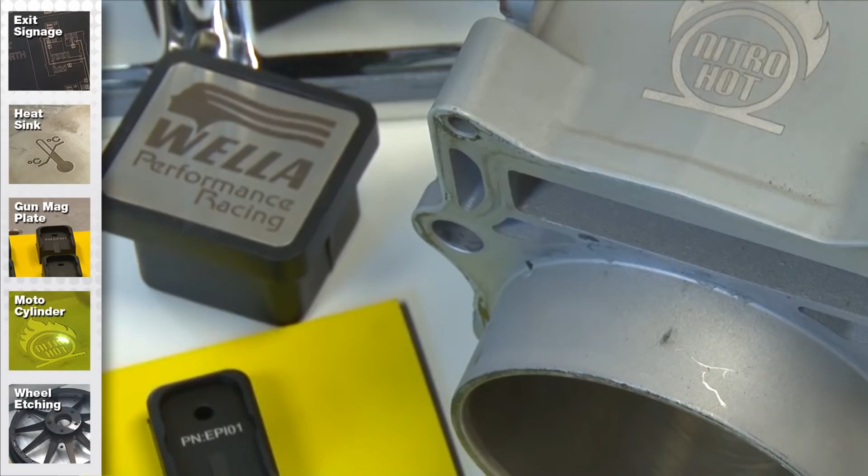So we've marked all the components with our new G2 laser system. You saw with the G2 that we're able to mark very large components, up to 24-inch size components. We can also mark in midfield at 16/16, and then also at near field, a 4-inch marking area. We're using non-proprietary software. In this case, we used CorelDRAW to create the graphic images. Again, you can use a variety of different software. What's really nice about our software suite is that once you send the job over to the laser, you're free to go back into the software and program your next job.

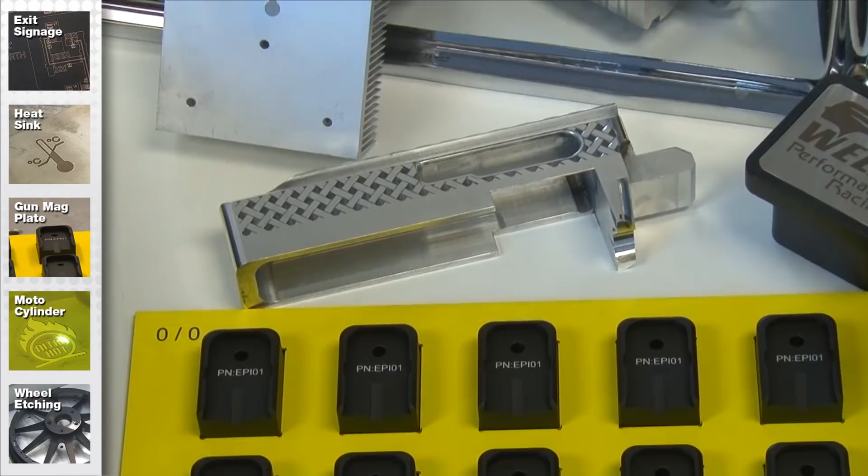A lot of Galvo-based systems with proprietary software tie up the resources of the computer and don't allow you to program the next job while the job is running. Also with the G2, we have network and USB connectivity, allowing our customers to use a variety of different Epilog systems on one computer. Also our XY coordinate systems using the edge guides in the machine allow for a really easy layout of the machines.

We also did some single part marking, just using midfield for marking on the cylinder head. And then the availability of the different lasers in the machine, the Q switch or the MOPA, offers our customers a lot of options to do different things with different types of materials. Any kind of metal, engineered plastics, we have customers using it for ceramics as well.